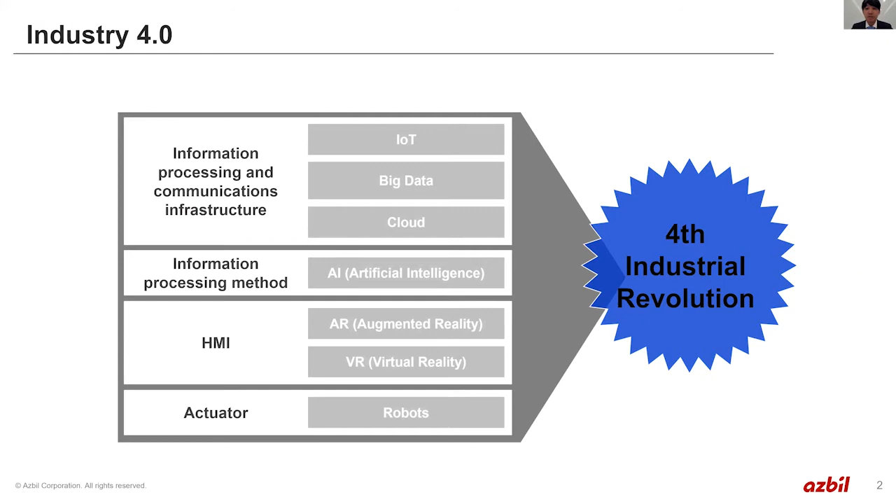So how does your factory change with Industry 4.0? First of all, let's look at the current plant operation monitoring and its issues. Normally, to operate a factory safely, we monitor and operate with process control system and patrol inspection regularly to ensure productivity.

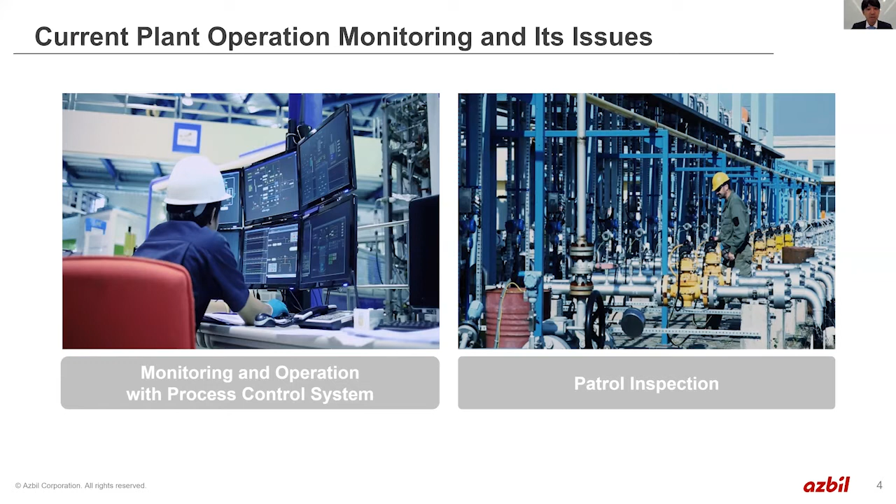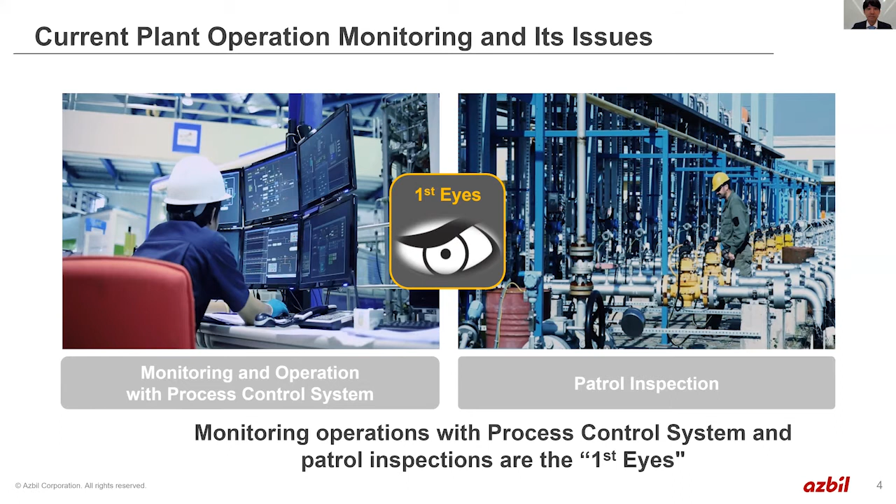Azbil calls this traditional monitoring operation with process control system and patrol inspection 'first eyes'. But there are some issues with first eyes.

Firstly, it's impacted by differences in operators' ability level. That may cause decreased level of situational awareness. Secondly, with the retirement of experienced operators and future decline of working population, there will be loss of skill and operation will have to be done with fewer people than now.

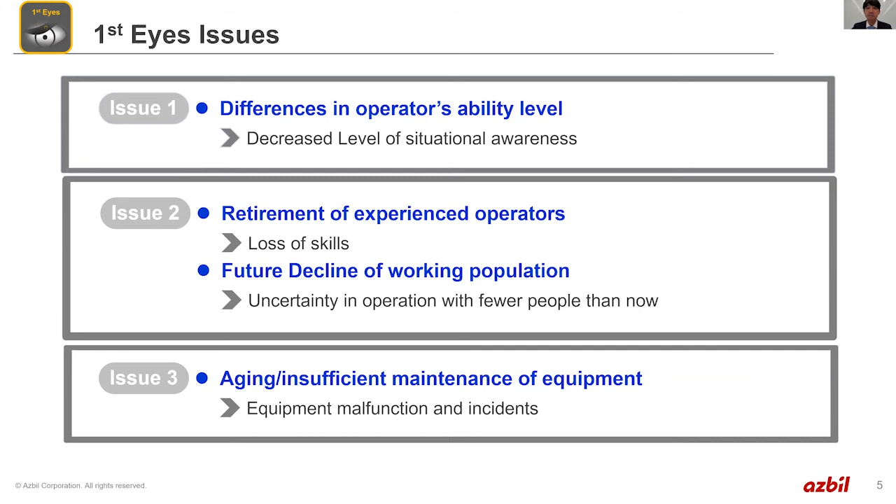Thirdly, with aging or insufficient maintenance of equipment, there is danger of equipment malfunction and incidents. If this continues, the workload will increase, critical alarms will be overlooked, and we will not be able to rely on operators for improvement of safety and productivity in plant.

To solve the issues that I just mentioned, Azbil recognized that in addition to first eyes, second eyes and third eyes are needed to increase the human situational awareness abilities. They help us improve site safety and productivity.

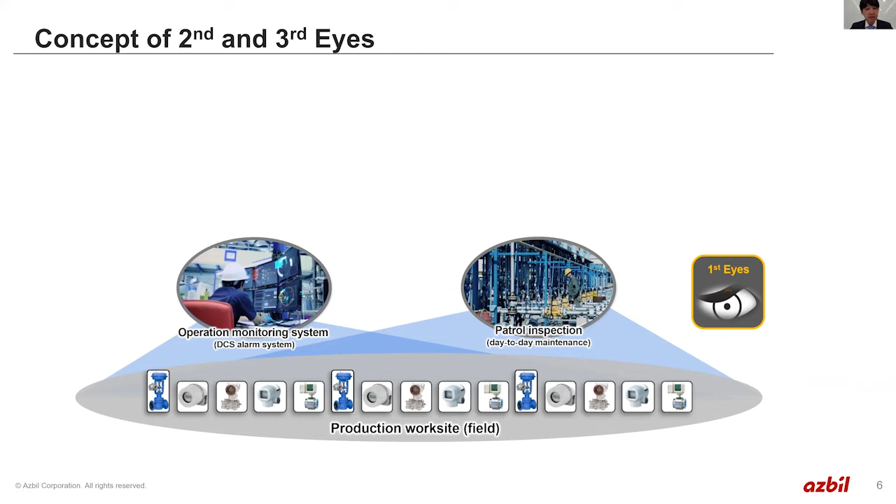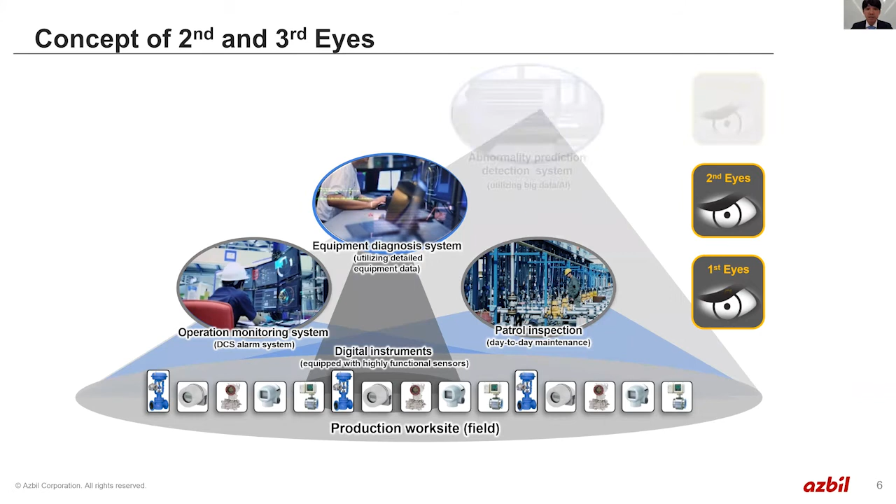We define second eyes as the implementation of optimal maintenance based on equipment diagnosed by high-performance sensors. Third eyes is detecting symptoms of abnormality and predicting future changes using AI and big data. They inherit and transcend the wisdom of experienced operators.

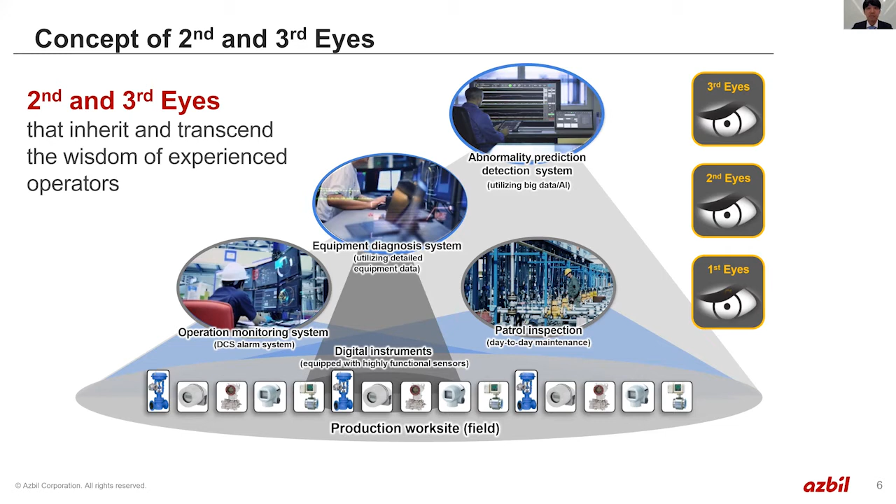By using second and third eyes, there will be an early awareness of abnormal situations and decision-making will be possible. For realizing a smart factory with second eyes, we detect irregularities in control valves and positioners at an early stage by control valve diagnosis. With third eyes, we provide the online anomaly monitoring system, which learns the normal state of plant with fuzzy neural network.

This detects and gives forewarning of any irregularities. And with early warning system for time series data, we are also able to forecast and visualize future fluctuation in process values that are important for safe management.

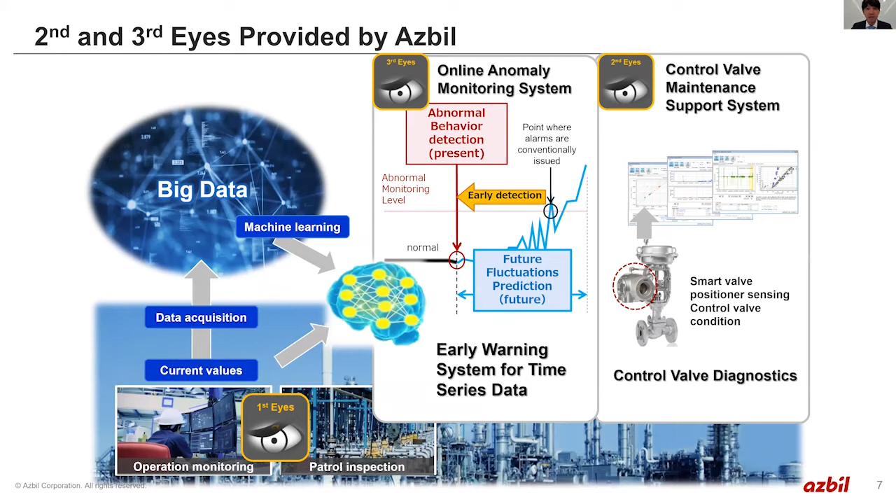Next, let me talk about case studies for second and third eyes. As second eyes, we provide the control valve maintenance support system. It's a diagnostic software that can visualize, analyze, and diagnose the control valve condition from the parameters that Azbil Smart Valve Positioner provides. For example, positioner output air pressure, valve travel, maximum friction force, 0-point position, etc.

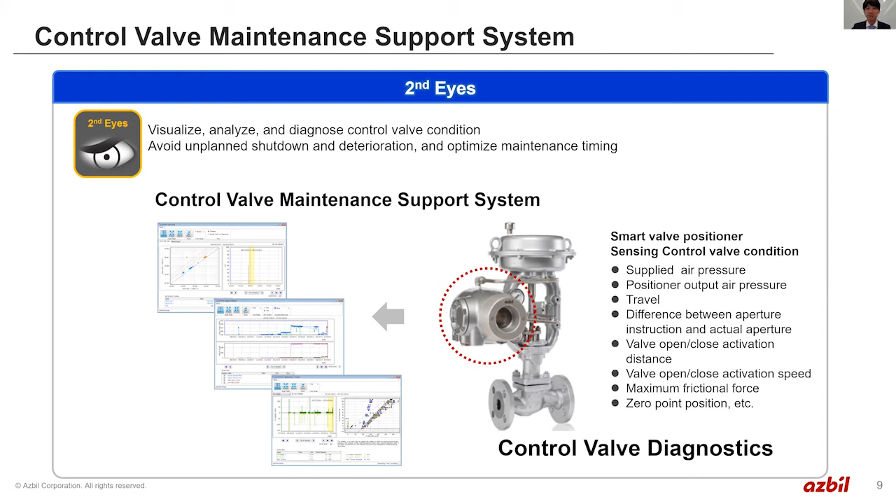By utilizing positional data, you can prevent unplanned shutdown of your factory and improve the productivity.

Azbil control valve maintenance support system greatly improves control valve maintenance quality. Control valves play a critical role in plant operation, so control valve maintenance is needed for safe operations.

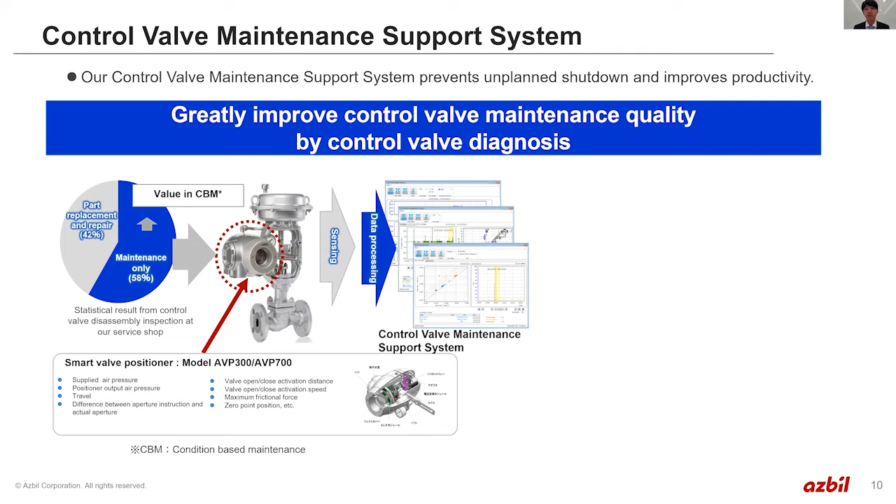By utilizing Azbil control valve maintenance support system, we can do condition-based maintenance. It not only provides early detection of control valve problems, but also reduces the cost of control valve maintenance by about 50%.

In a certain factory case study, we found out that the maintenance costs become half, and a big loss by an unexpected equipment shutdown caused by control valve error was avoided by utilizing Azbil control valve maintenance support system.

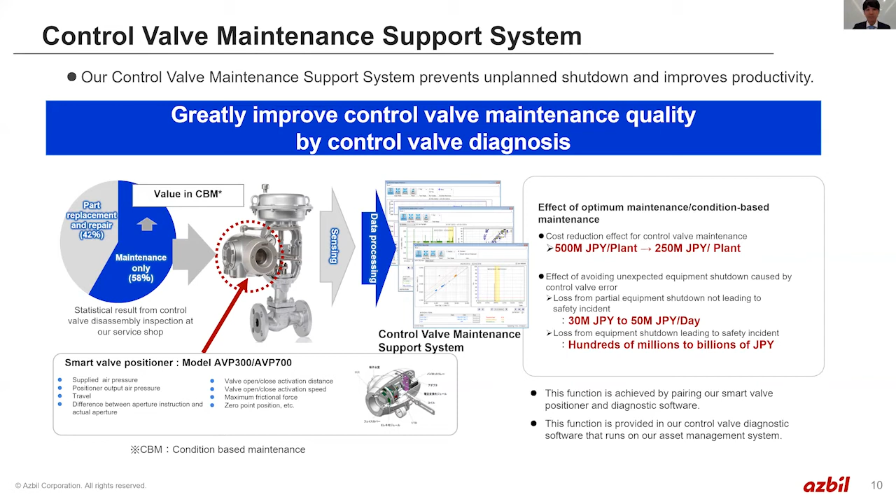This is a case study where Azbil control valve maintenance support system helped to avoid unplanned shutdown by early detection of control valve poor condition at a chemical company.

The user discovered that max travel speed of the control valve suddenly increased for a duration of 2 weeks. Travel speed was low for 3 months. Sliding motion of the valve plug had to be smooth.

In case of this plant, stick slip phenomenon had occurred due to the progress of polymerization inside the valve. Stick slip is a term used when the control valve does not operate smoothly due to excessive friction. Stick slip diagnosis uses an algorithm to quantitatively detect this problem.

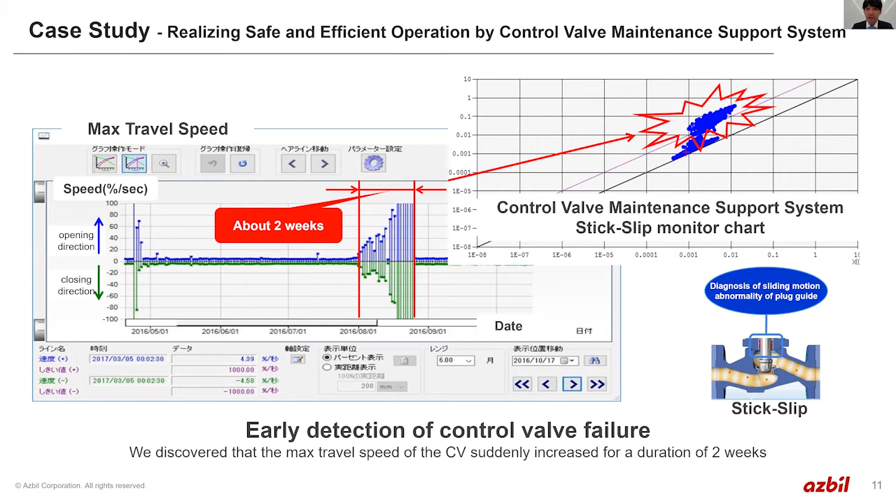Safe and efficient operation was realized by avoiding unexpected control valve failure.

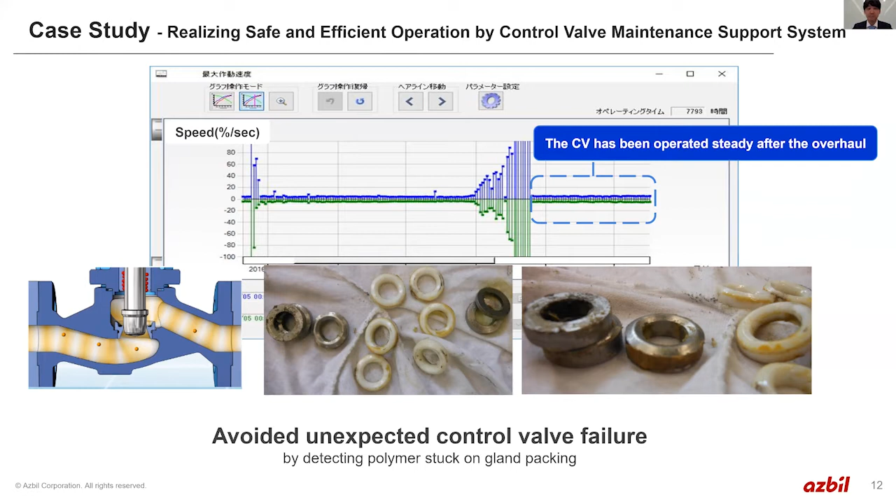Furthermore, Azbil control valve maintenance support system improves the way control valve testing is conducted. It helps you drastically reduce the manpower required for step response test and loop test.

For example, if you conduct a step response test for 200 control valves with 2 pattern tests, 400 tests will be required. This will take about 7 days with 2 people using the conventional valve test.

On the other hand, if you utilize Azbil control valve maintenance support system, you can conduct the tests in only 2 hours with 1 person.

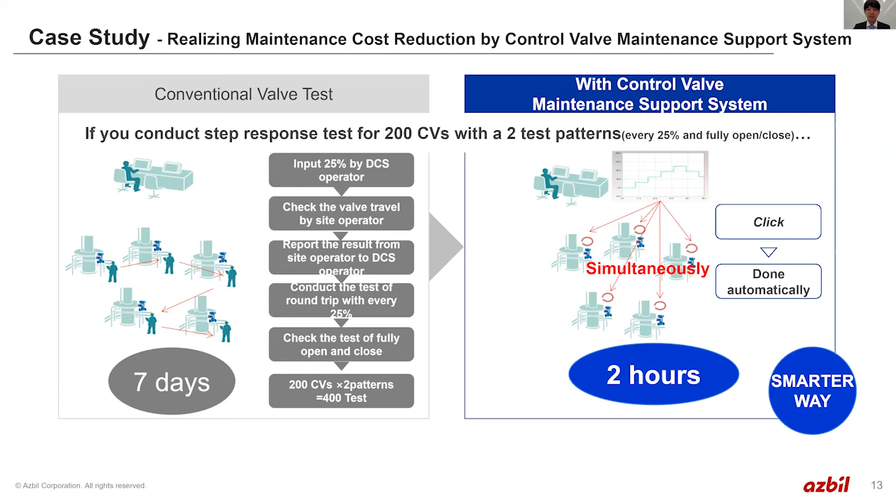After you click on the display of Azbil control valve maintenance support system, step response test is done automatically. Thus, we can drastically reduce the manpower required for step response test or loop test and realize maintenance cost reduction. Also, the user can start operating earlier than usual.

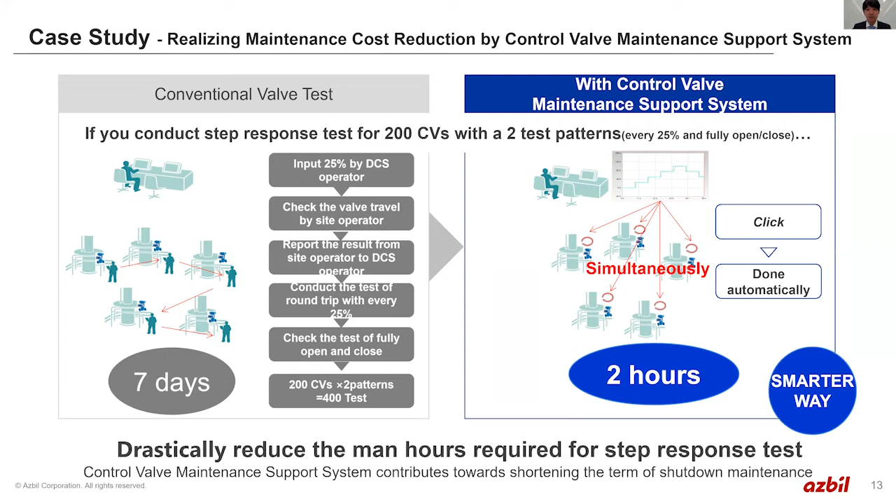Next is a case study of Third Eyes. Third Eyes learns past behavior for early detection, visualization, and warning of behavior different than usual.

With Third Eyes, we provide the online anomaly monitoring system, which learns the normal state of a plant with a fuzzy neural network. This detects and gives a warning of any irregularities.

And with the early warning system for time series data, we are also able to forecast and visualize future fluctuation in process values that are important for safe management.

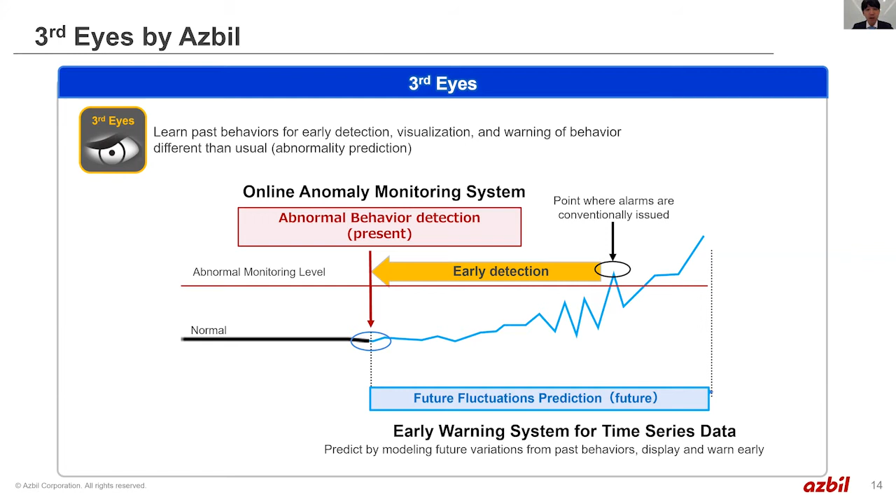Online anomaly monitoring system is one of Azbil's AI applications. It learns various operating patterns from big data and analyzes in the same way as experienced operators, judging to detect behavior different than usual.

As for the mechanism, the system utilizes long-term process data that has been collected by the plant information management system to automatically generate a model that has been taught normal sensor readings and control output from PID controllers. Anomalous behavior from failing or defective equipment is quickly detected by this model, and notification is sent to operators.

The blue line is the actual measurement of process data. An alert is announced when the actual measurement exceeds the estimated normal range.

From our experience, this system detected the abnormality 2 hours before the operator. Also, abnormal readings were recorded 1 week before an experienced operator noticed. This system helps us prevent troubles due to equipment malfunction in advance.

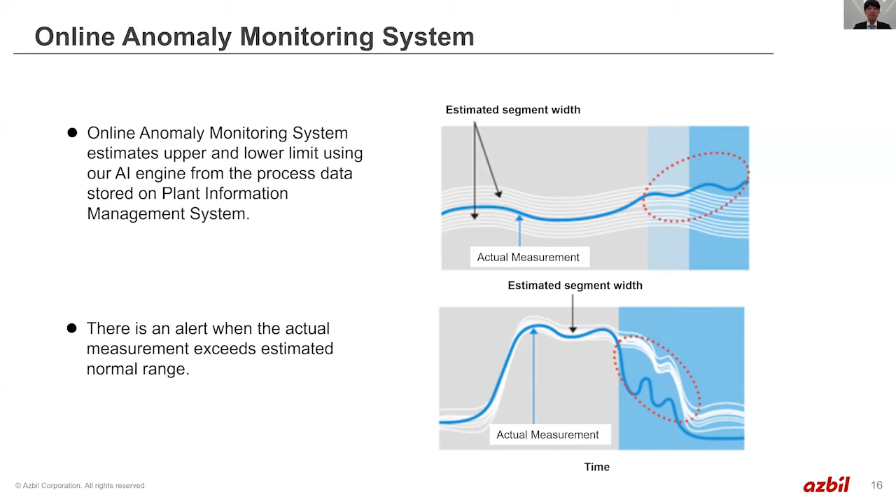Next is the early warning system for time series data, as Third Eyes. There are 3 blind spots of this alarm system. First is rapid fluctuation of process variables before the DCS alarm occurs. Second is recurring deterioration while the DCS alarm is active after handling.

Third is recurring deterioration after emergency shutdown. These situations cannot be detected with the DCS alarm system, and therefore serious accidents occur, for example, at chemical plants.

In addition, when an accident occurs, the DCS alarm system is flooded with alarms. Important alarms are buried in the flood of alarms, keeping the operator from seeing them.

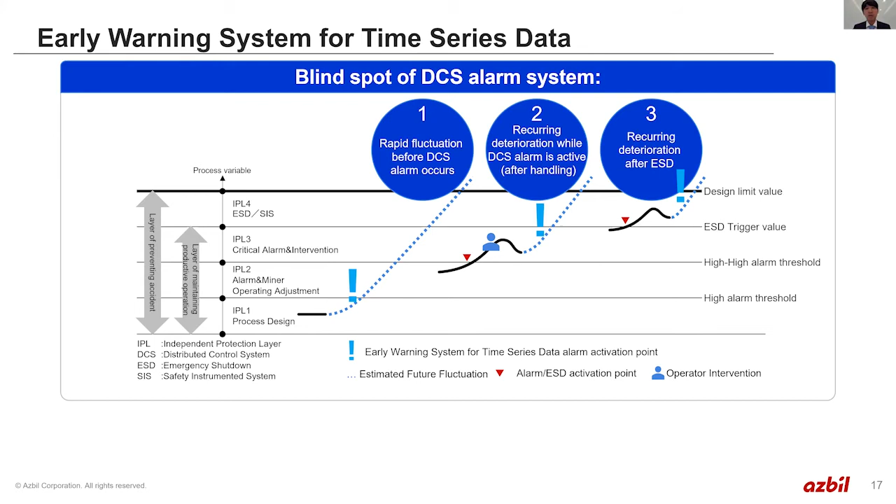Furthermore, even though signs of anomalies begin to appear 30 to 150 minutes before the accident, operators and managers don't notice them and can't prevent the accident. If the future can be seen or is known, the future can be improved.

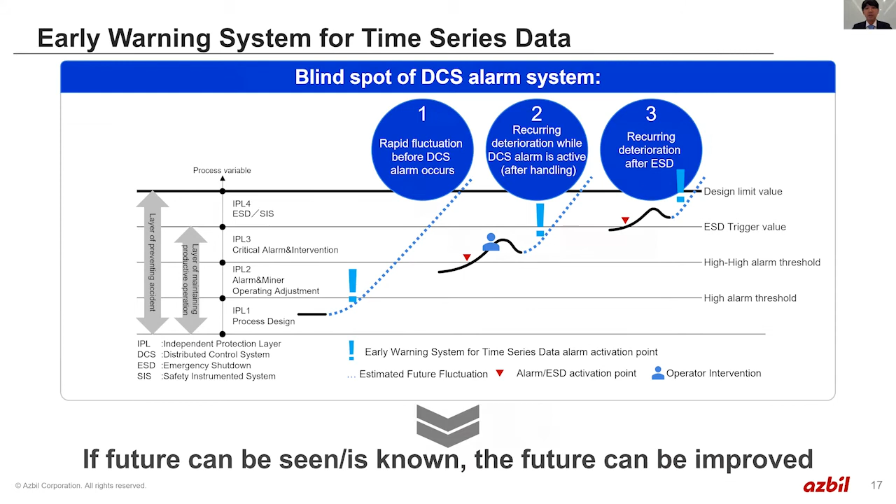An early warning system for time series data can detect these 3 blind spots of the DCS alarm system. This system constantly monitors behaviors in important process variables automatically and predicts and displays their future behaviors.

In the near future, when those process variables are predicted to reach critical control values, a future prediction alarm occurs. Also, the predicted time to reaching a critical control value is displayed. Those future trends can be displayed on large monitors so everyone in the control room can notice.

Thus, this system contributes to a highly reliable and secure framework for team operation.

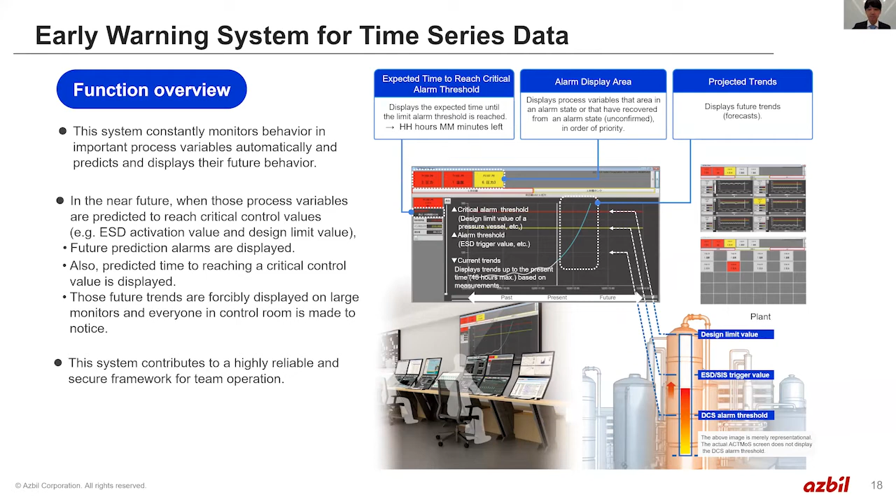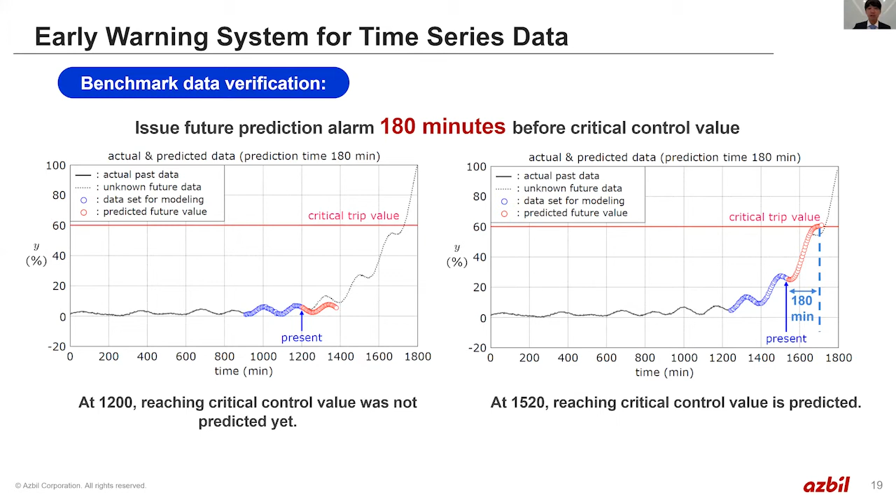In concluding this presentation, I would like to summarize our major points. Second and third eyes provided by Azbil include human situational awareness abilities and help improve site safety and productivity. Also, Azbil can provide not only the product I introduced today, but also other solutions, including field devices.

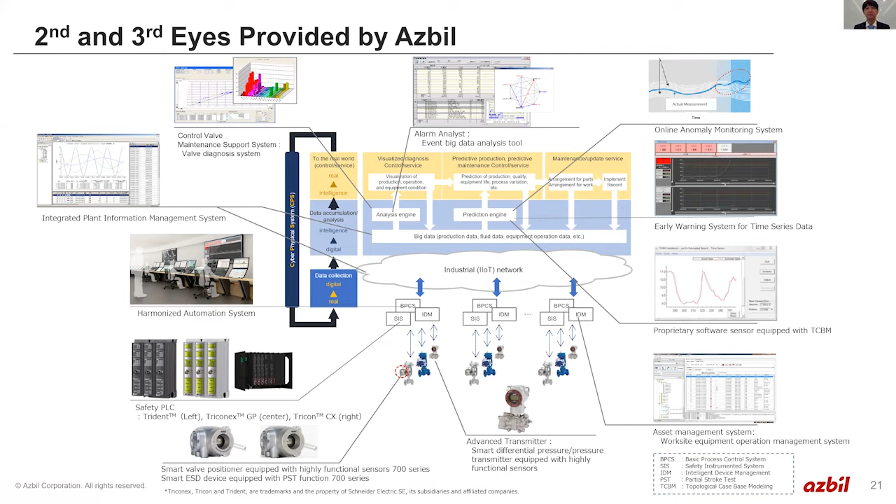Lastly, we provide comprehensive solutions and services from control systems to valves and other field devices. We have the know-how on valves and other field devices, so we provide maintenance service as well as control system solutions.

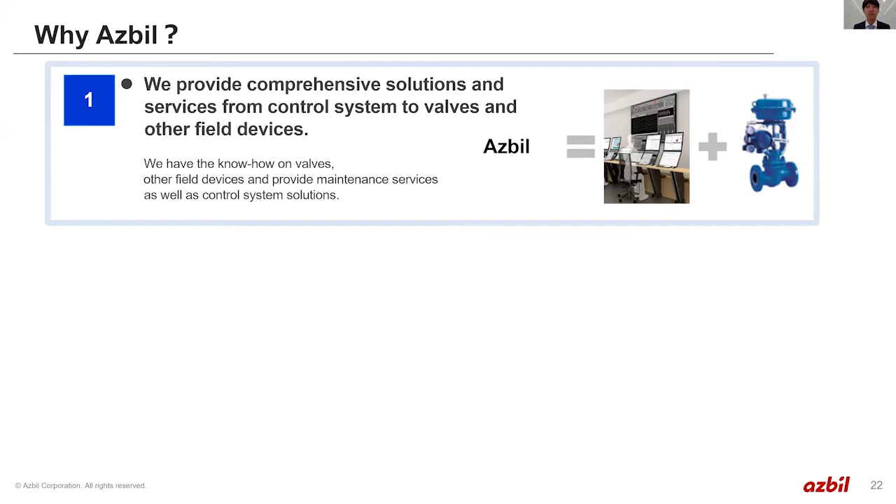We can merge Industry 4.0 and process automation know-how cultivated over many years. Even if computer manufacturers can utilize statistics and analysis technology, an optimal solution cannot be reached without knowledge related to measurement and control automation. Azbil is a control manufacturer that utilizes IoT, big data, AI, and more with understanding of processes.

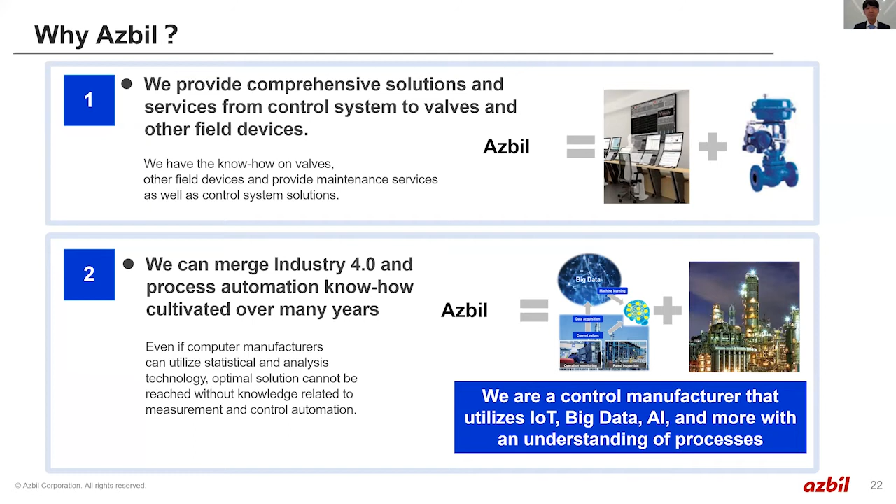If you would like to realize a smart factory, please contact us. On behalf of Azbil, I'd like to thank you all very much for your attention.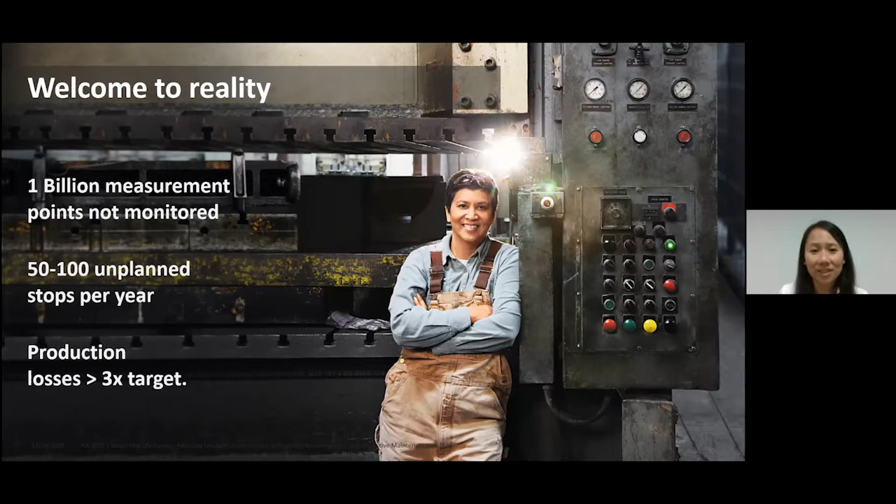So what sets us apart? Our current portfolio already offers many products and services around the life cycle of the rotating asset: condition monitoring, maintenance tools, lubricator services, and other essential components. However, this doesn't set us apart from our competitors who have a similar portfolio. What sets us apart is how we combine the individual products and services and what design principles we follow.

Digital first, customer and service centricity. We enable Schaeffler knowledge to be used in one user interface. It's easy - we target non-expert customers and our services can be used with little or no training at all. And of course, true solution thinking: we enable superior solution value, low cost and unique services because our entire portfolio is built on one architecture, making it much easier to combine for the customer.

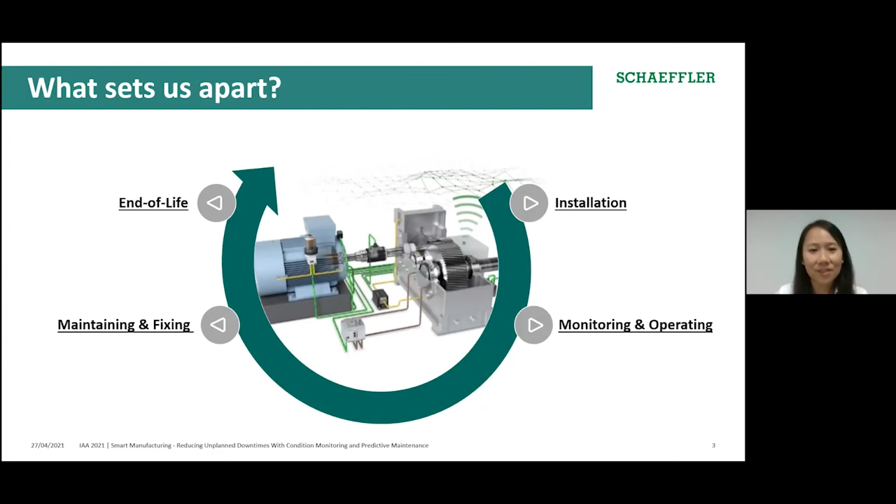So what does that mean? It means for us that digital is first, the focus is radically on the user, easy to use without expertise, and of course true solution thinking - from installation, monitoring and operating, to maintaining and fixing, towards end of life.

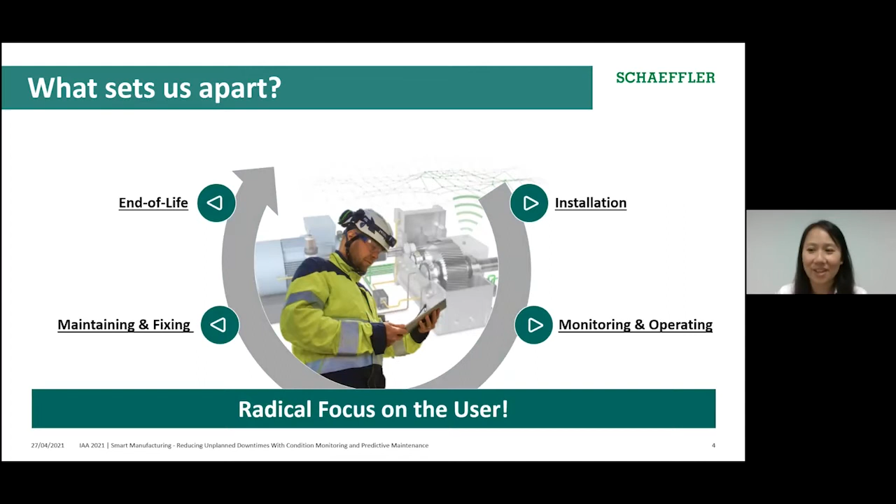6% of our machines have high criticality, which we monitor with online monitoring solutions. The light green here on the right-hand side, 36%, are typically unsupervised or route-based measurements, typically used with handhelds. The left-hand side shows 50% of machines with low criticality - these are typically auxiliary machines such as e-motors, fans and blowers and so forth.

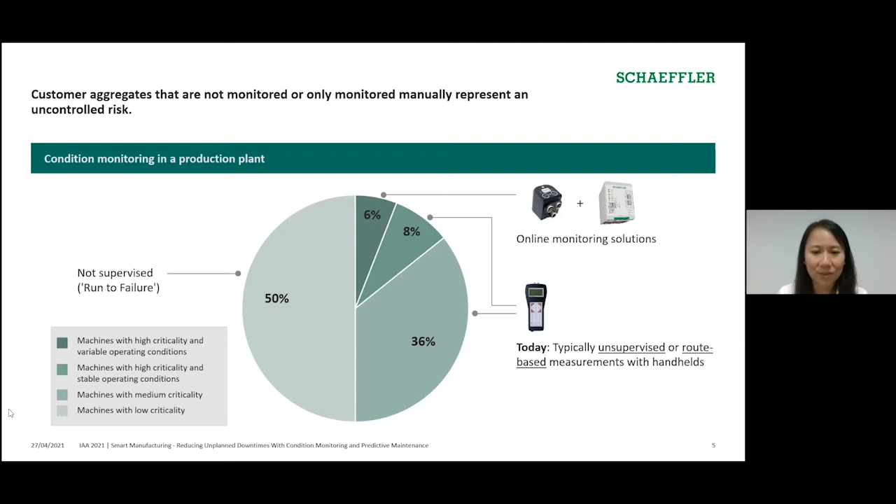This means that 94% of our machines can now be monitored with our award-winning OPTIME solution. This solution is affordable, easy, and plug and play.

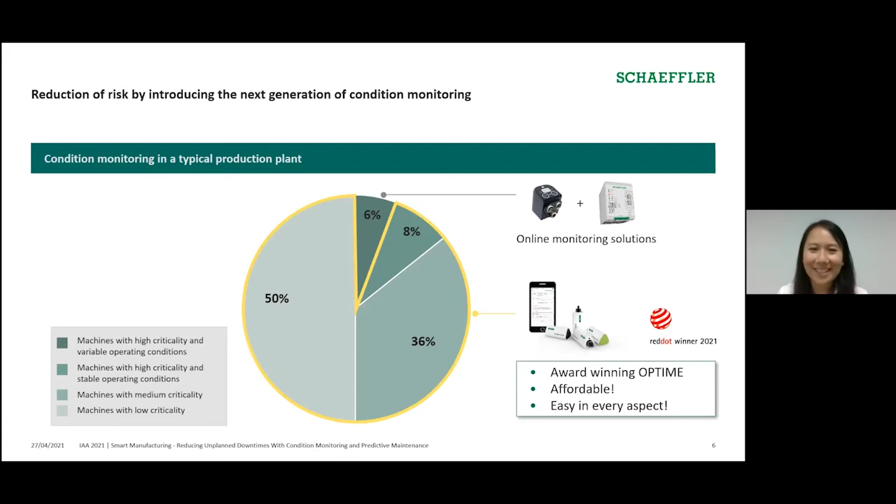Our inner circle here represents products for your core production equipment and critical machines, ranging from the ProLink, our Arcanol lubrication, and of course our heater ranges such as the MFT.

Products in the middle are for process-related equipment machines that need continuous monitoring of data. They range from the Smart Check, the lubricators here, our Arcanol lubrication, and of course our medium-range heaters.

The outer circle are for auxiliary equipment, such as e-motors, facility fans, blowers, which tend not to be monitored, but can now be easily monitored using our OPTIME solution and Concept lubricator products.

Our condition monitoring products range from the inner circle, ProLink, Smart Check, to the outer circle, OPTIME, and they cover the full suite of monitoring various rotating machinery in the production plant.

A combination of these resulted in close to 50,000 euros of savings from unplanned downtimes in our plant in Vietnam. Our digital pilot plant also uses a combination of Arcanol lubrication and automatic lubricators, and we've already seen a 25% reduction in maintenance costs from this.

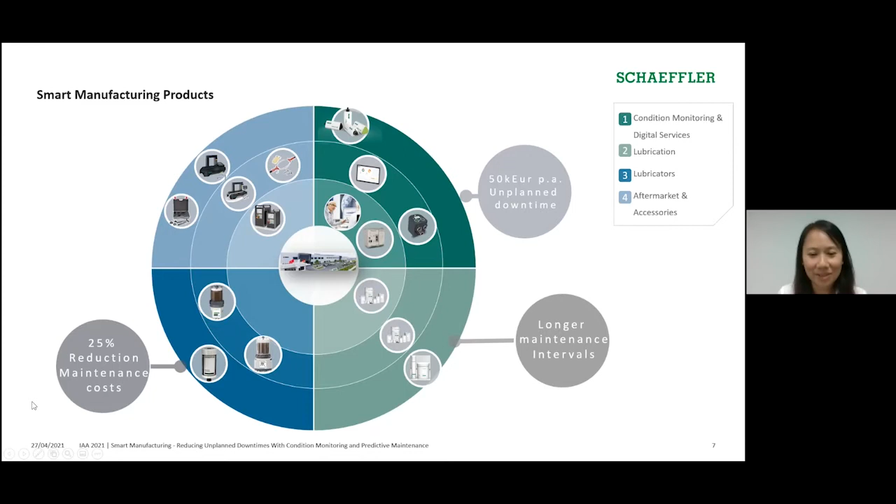The full condition monitoring solution is accessible with one user experience, from OPTIME on the top right to ProLinks, Smart Check, our Concept lubricators, and of course the remote services using our experts to support the customers.

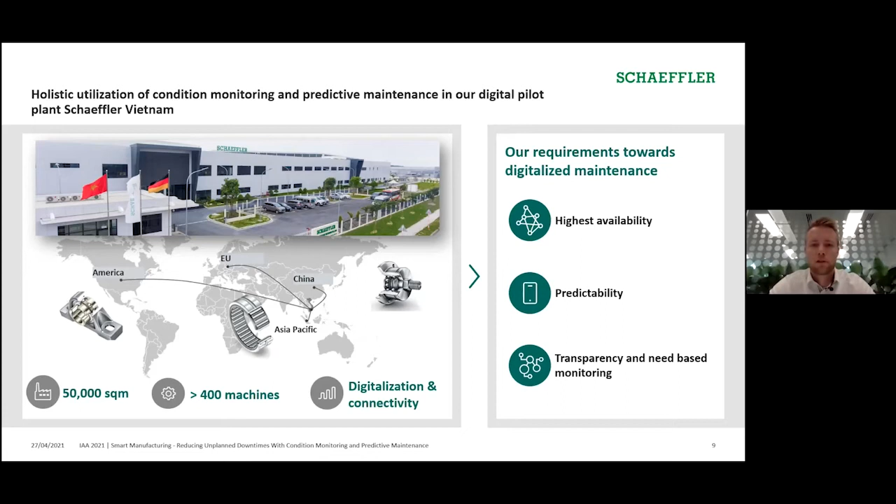Besides that, we want to use digitalization to create transparency and also a need-based monitoring of our machines and equipment on our shop floor.

So what does that mean, especially for our plant here in Vietnam? We've been applying all of these solutions which Ling showed before in her presentation, and you see this here as an example, the picture of our plant here in Vietnam.

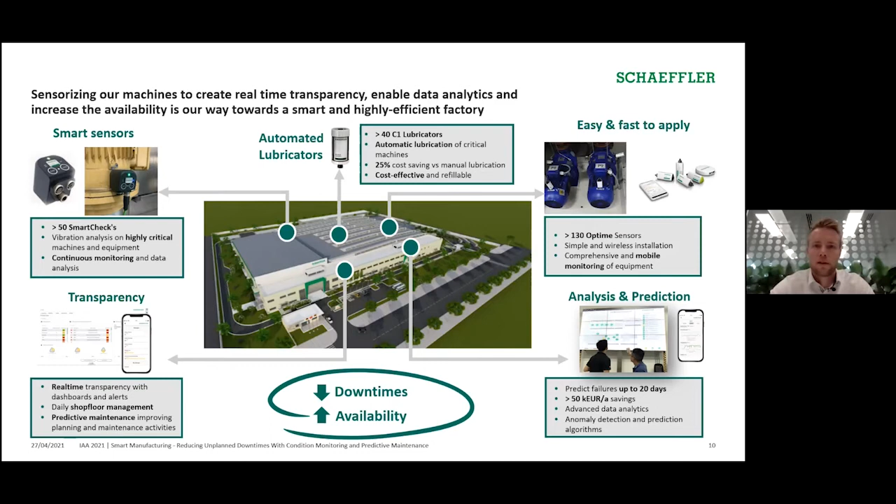Furthermore, we are now using these big amounts of data, since we have so many sensors always collecting data, to do more advanced data analytics, for example in anomaly detection and prediction algorithms. Overall, these solutions have helped us reduce our downtimes and therefore, as I said in the beginning, increase the availability of our machines.

Summing up, showing you our three main success factors in the area of condition monitoring and predictive maintenance: the first step was demand-based sensorization and data collection through these sensors, then visualizing and analyzing this data, and coming to a stage of predictive maintenance. All of this helped us reduce downtimes in the plant and increase the availability of our machines.

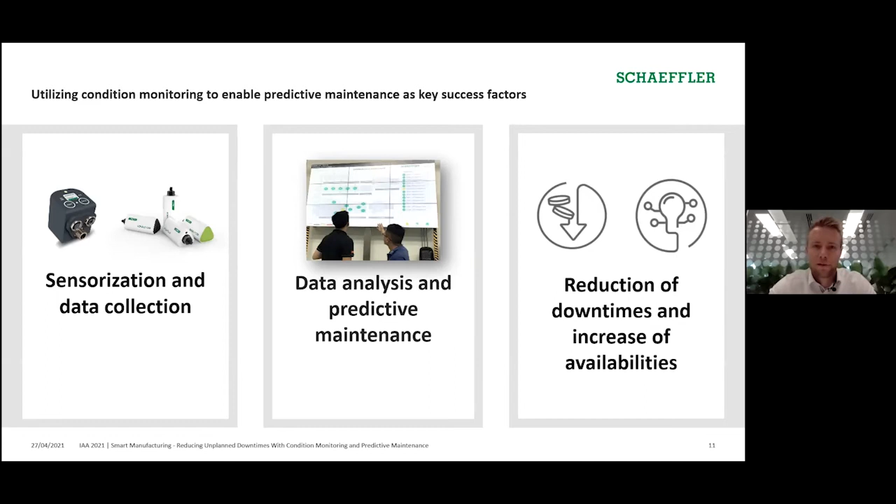First, we'll discuss how automation, machine learning, and the Internet of Things are paving the way for Industry 4.0. Over to you, Faraz. Hey guys, Faraz here from Vertiv, Product Manager of IT and Edge Infrastructure. Today I'm going to be talking about smart manufacturing, or Industry 4.0, or more importantly, the movement, or what you need to get to Industry 4.0.

Before I begin on the concept, I want to talk about the movement or the vision. Whether or not you're aware of it, we've been moving from Industry 1.0 and now we're trying to get to 4.0. But what does it all mean? Where we're beginning is we began at 1.0. That was the early concept of industrialization, getting things on an assembly line. Then moving to 2.0, which was doing that at economies of scale, or mass production.

When we got to mass production, or that level of efficient resources, we said, hang on a minute, why can't we do this with automation? Hence came 3.0, or Industry 3.0, which was manufacturing or the industry in general gaining the ability to have your robotics or your assembly line automated, doing things with very limited human intervention. Of course, you still need human intervention, but it was the ability to have the automation, the computers, or your electronics make things more efficient for yourself.

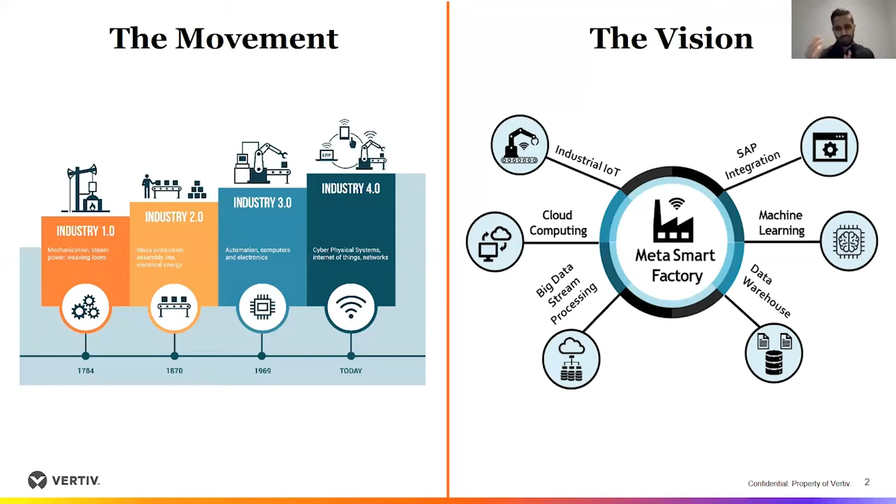So what does this all mean? All the time you see these buzzwords - you see M2M or machine to machine, you see machine learning, you see digital transformation, you see artificial intelligence. Sometimes all of these words get floated out there, but at the end of the day, why do they exist and what do they mean?

You've seen now Industry 3.0 and 4.0, but what does machine to machine or machine learning mean? At the end of the day, machine to machine is the ability to have literally one machine talk to another machine with very limited human interaction. What that improves is what we call latency - the ability to get data from one point to another and process it very quickly. But then, what does machine learning mean?

Think of a feedback loop where we, as humans, perform a task and learn from our failures - very similar to machine learning. Machine learning is the ability to go, hang on a minute, I processed a task, I've learned a better way to process it, so next time I'm going to do this task better or quicker, i.e. more efficient. Being able to provide that feedback loop to say, I did it one way first time around, but I think I can use the resources or processes to do it quicker by another route. Eventually you get to a point where machines are working indirectly faster than human interaction, which is where we want to be.

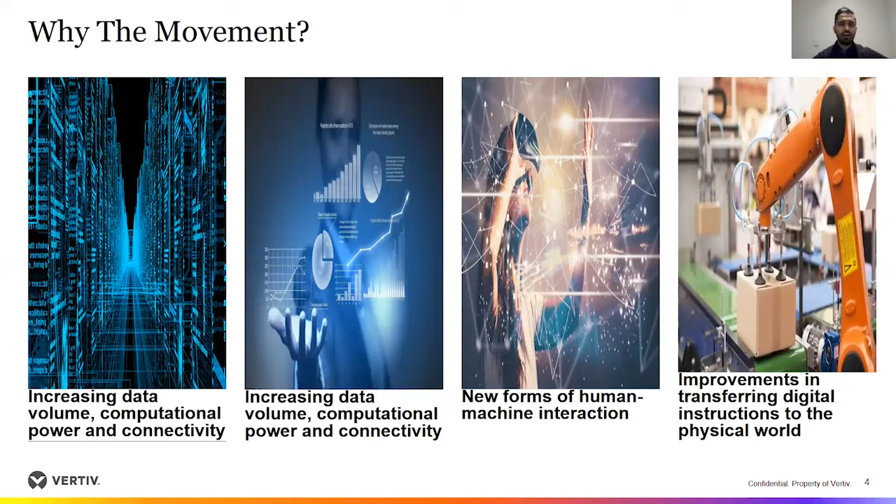So as this starts happening, as latency starts decreasing, as demand gets higher, we are going to need this more and more.

Going from a business in terms of operational reports, trying to get real-time information so you can improve your ERP or your resource management, trying to get real-time or meaningful dashboards, i.e. financial dashboards, being able to forecast in terms of what am I going to order, what am I going to deliver, what am I going to have in 3 months or 6 months, right? Part of your ERP system.

And then that holy grail or the end goal in terms of what are we going to do with predictive analytics or predictive failure. So let alone learning how to go in and make sure it doesn't fail, but imagine being able to tell your customer that, hey, in 3 to 4, 5 or 6 months time, this particular endpoint is going to fail, or we predict based on previous data it's going to fail.

Imagine how powerful that's going to be for the customer, where as opposed to going, hey, we have to come in monthly or quarterly, half yearly or yearly to do proactive maintenance, how cool would it be if you could say, hang on a minute, we'll only come in when we predict something's going to fail, heavily reducing the OPEX cost back to your customer, okay?

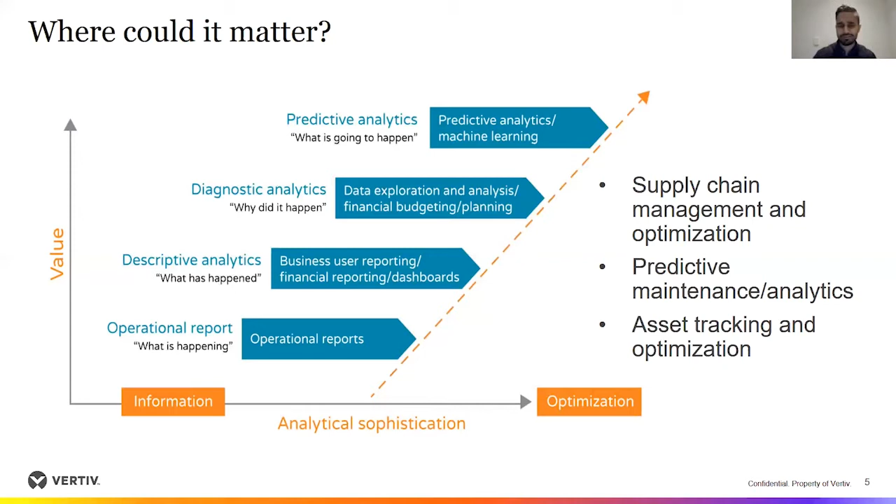What this kind of means is, you've got some sort of logic controller at the very bottom. That is the kind of brains in your assembly line to say, I am processing X, Y, and Z operations to do a particular function. I'm going to push the information up to a SCADA system. Now that SCADA system is an overarching monitoring or management system to say, I'm going to look at my entire plant and see what the plant is doing and bring all that data in.

All that data eventually gets to what's called an MES, okay, or a manufacturing execution system. At the end of the day, the MES system is in charge of things like your set points, your operating instructions, your level of maintenance, your QC, your resource scheduling, right? At the end of the day, this is what tells the device what to do. Once it gets that information from SCADA, MES goes, okay, I've got real-time info, I'm going to do something about it.

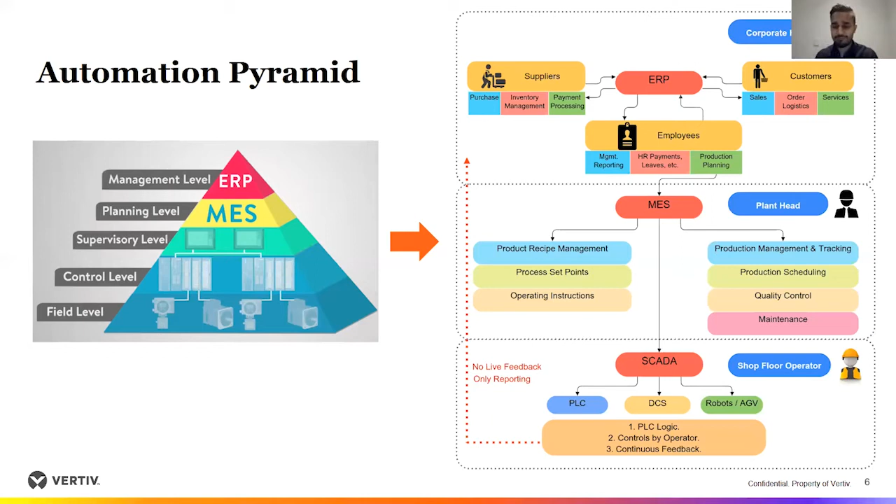So where have we at Vertiv seen this scenario in a real case? A cool example here is Tasmanian salmon, or Tassal. We had a unique pain point with our customer here, Tassal, or Tasmanian salmon, where they were harvesting or processing salmon via pens. At that point in time, they had operators saying it's good, but we're using gut feeling or knowledge in terms of when to feed the fish and when to harvest them.

They said, why don't we take it one step further? These 19,000 fish per pen over these 19 pens - what if we had temp sensors, water flow current sensors, humidity sensors, salinity sensors, visible sunlight, all of this, and we can get optimal levels of when to feed the fish and when to harvest it. And the amount of feed they saved was so significant in terms of getting real-time information all the time to know when to feed them and when to harvest them - it was absolutely immaculate.

We got to the point where we said, guys, the whole point of fishery is to have your salmon in there and make sure that you're providing your feed, and harvesting the result of your feed at your optimal point, using real-time data, active data. So getting your sensors to feed that SCADA system, feeding the MES system, which is actually controlling the feed. But most importantly, that MES system is talking to your ERP system and saying, guys, we're running out of salmon feed, order us more - and it'll automatically come in to make sure you're never short.

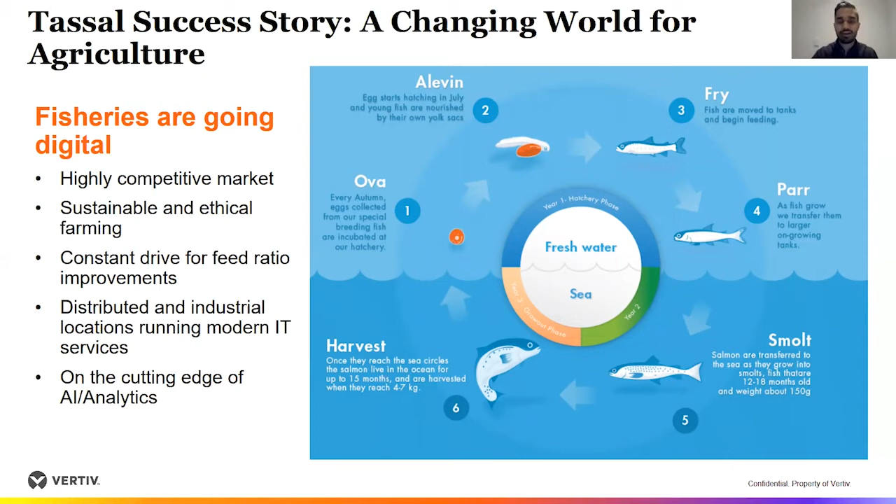Proactively available. And then you eventually get to the point where you're building this ecosystem to say, I've got a whole neural network to say I can bring a salmon all the way from when it's a very young egg and get to the point where it's ready for human consumption, or where me as a business is going to generate revenue. That's most powerful because when you have eyes on your entire process, one, you can improve your operational efficiency, but two, you're obviously reducing your cost and increasing your operational margin.

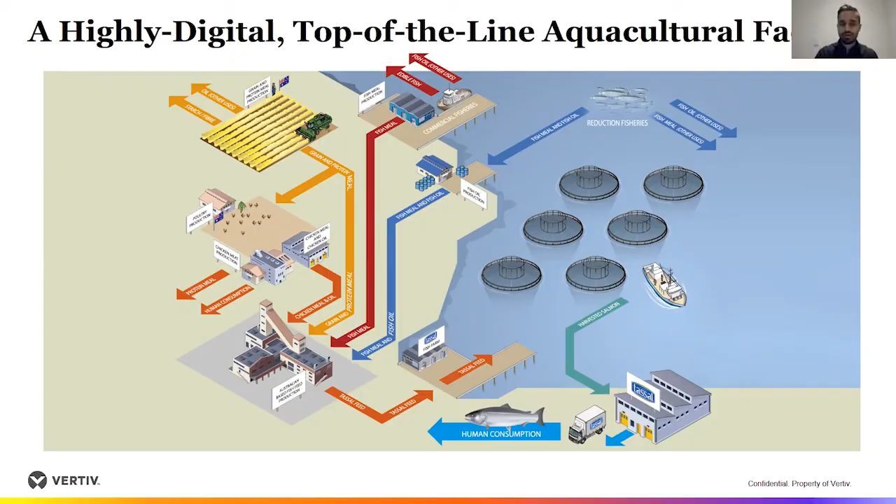And then as a result, we as Vertiv got in there with a micro data center and said, guys, well, all these sensors are going to be going back to some level of data. That data needs to be processed and stored, and then eventuated and sent back as real-time information.

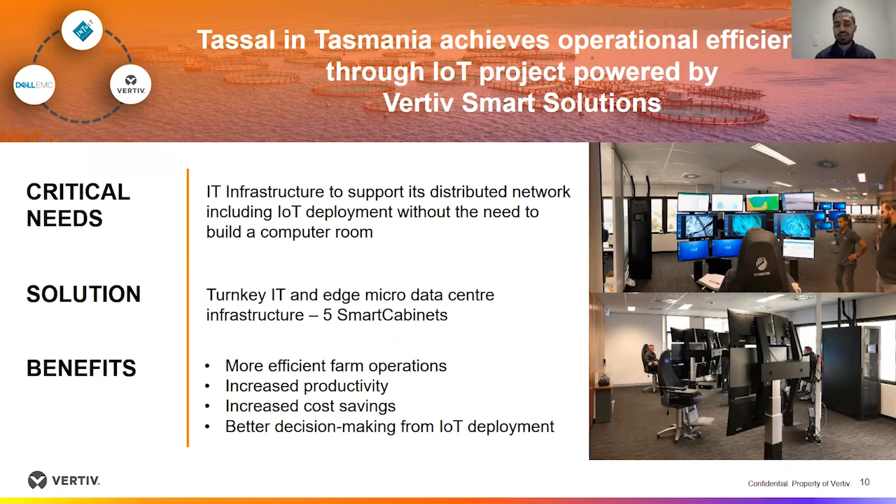Second example here is the whole concept of the edge. We hear the concept of the edge, we hear 5G, we hear IoT - but what does it mean? 5G has obviously been coming on the radar for a very long time now.

So what does that kind of mean? We know in Australia and globally we're trying to look for things like renewable energy or sustainable infrastructure - whether it's wind, solar, hydrogen fuel cells, or hydro, at the end of the day we're trying to meet some level of renewable energy. In this particular example, we used a mix of 5G and renewable energy via solar.

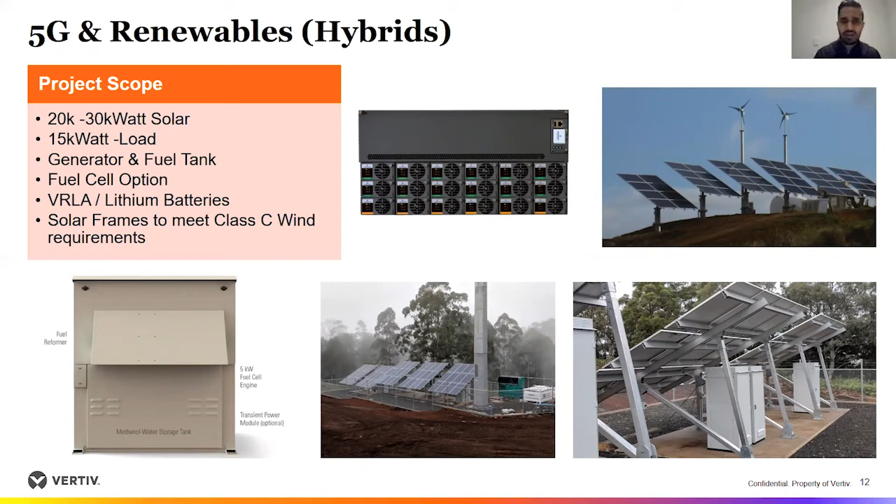What this meant was it was a perfect solution for one of our large water transport customers, who had boats traveling through waterway systems. At the end of the day, they didn't know how much impact the traffic or speed of the boats had on erosion, and the wake was wearing down the water banks. This was a problem because it was unnecessarily filling the banks with dirt, sand, and other pollutants, and actually degrading the land around it.

So they said, if we can start using 4G or 5G cameras to do real-time monitoring to see what type of boats are going through and how quickly, we could get automation in terms of software to measure how quickly boat X was traveling and how many boats traveled through in that hour. Then we could cross-correlate that data with erosion to work out how much impact these boats have on the water bank erosion.

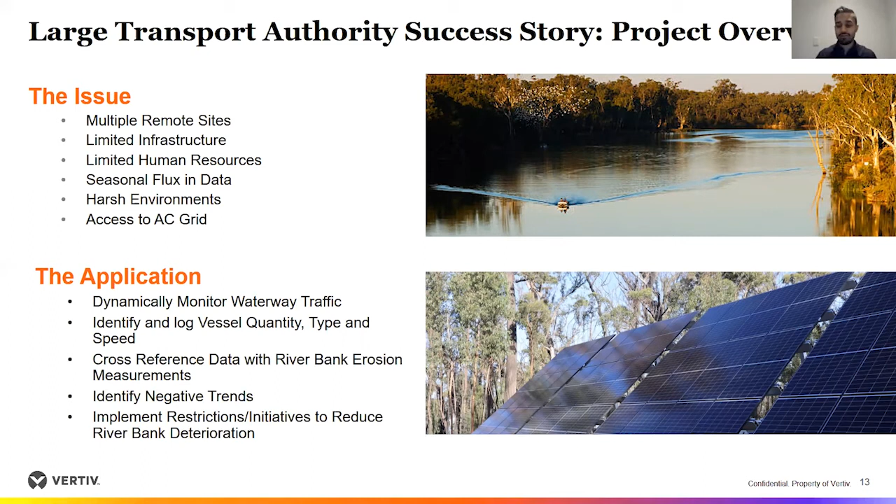As a result, we here at Vertiv designed this solution: we had our 4G or 5G access connected to cameras, backed up by batteries, and the batteries were charged by a solar array. We also had wind turbines as a backup, but the primary was solar. The importance of this is - whether you've got manufacturing, retail, transport, or industrial, whatever it is - if you're moving to sustainable, why not go to solar panels, hydrogen, or wind?

So I'm going to sum it up here in terms of what smart manufacturing, retail, industrial is, what IoT means, what digital transformation means, and how this translates into real-time use cases, where we go from one side of the spectrum using real-time data for smart industrial manufacturing, agriculture, or aquaculture, to the other side, smart transport, boats traveling the waterways, smart industrial, or most importantly, renewable.